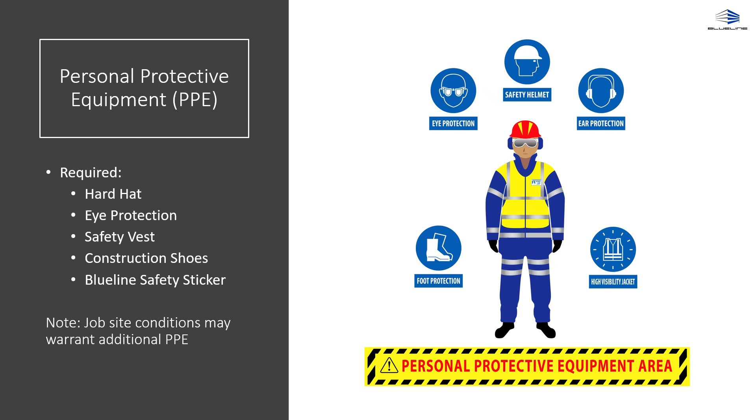If you come to the job site without the required PPE, it will be provided to you for an additional fee. Only authorized personnel are allowed on the job site, meaning if someone does not have their PPE, Blueline safety sticker, or is not a laborer or on the project team, then they are not allowed on site.

Safety stickers must be visible and worn at all times. If your sticker falls off, please report it to a member of the Blueline construction team and we will get you a replacement.

Any and all visitors must check in with the on-site superintendent or at the main construction office if applicable. If you see someone on site who does not look authorized to be there, please report it to the on-site superintendent immediately. Unauthorized individuals on site will be dismissed immediately and trespassers will be prosecuted.

The next two slides cover some general safety rules for the job site. Additional rules may apply depending on on-site conditions. The rules are as follows.

Emergencies: Every employee must know the emergency evacuation plan and their responsibilities in it. If you do not know the emergency evacuation plan, please contact your superintendent. First aid: Employees must notify a foreman immediately after any injury, regardless of its severity. Employees shall call 911 immediately only if an injury is life-threatening.

Smoking: Smoking is strictly forbidden. Authorized operation: Only authorized persons are permitted to operate, repair, or adjust machinery, vehicles, or equipment. Safety signs, tags, and posted speed limits.

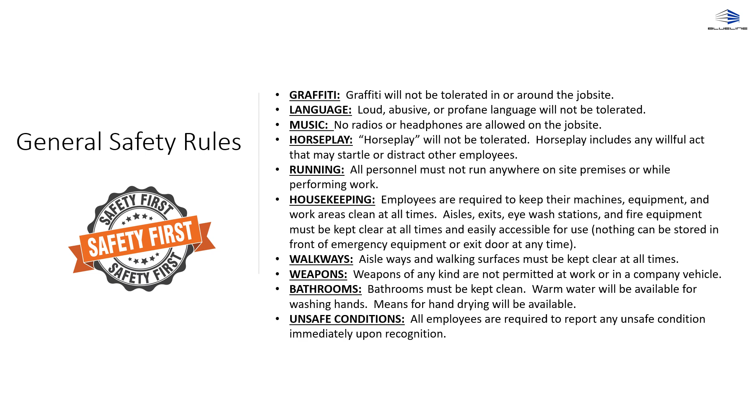Blueline recognizes that cell phones are a useful and necessary tool for project completion. However, while on the job site, cell phone use is to be limited to work purposes, like confirming scope with your project manager, asking an RFI, or calling in emergencies, and while on break. Personal cell phone use, like checking social media or personal messages, is to be limited to breaks only. Using your cell phone for personal use during work poses a danger to yourself and others because it is a major distraction. Your attention should be focused on the task at hand and not your phone. Please remember to always stay alert.

Porta potties and wash stations will be provided on the job site for your use. Do not use the on-site interior restrooms unless it has been cleared by property management. If you do not know if the interior restrooms are available, please ask the on-site superintendent. Please remember that we all share these and to keep them clean and tidy. Graffiti in or on the restroom stations will not be tolerated.

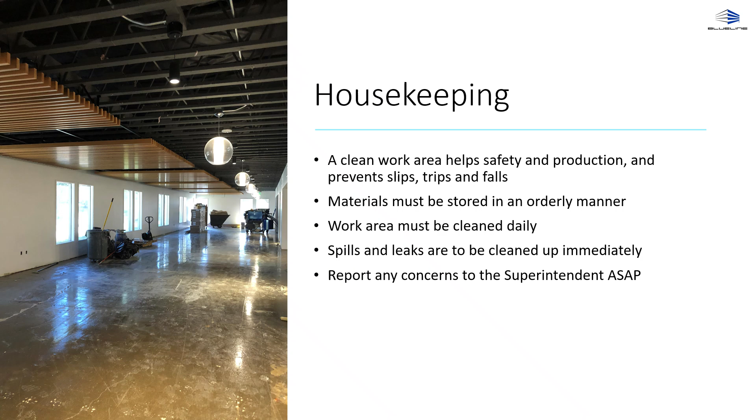If there is an issue with one of the restrooms, please report it to Blueline superintendent immediately. A clean and organized workplace not only helps with production, but prevents slips, trips, and falls, and improves overall safety of the job site. Remember to properly store all your tools and materials and clean your work area daily. You are responsible for your work area's cleanliness and trash cleanup. Do not leave garbage lying around. If you see a spill or leak, please clean it up immediately and report any concerns to the on-site superintendent. The job site is our office, and we want to take pride in it by keeping it clean and organized.

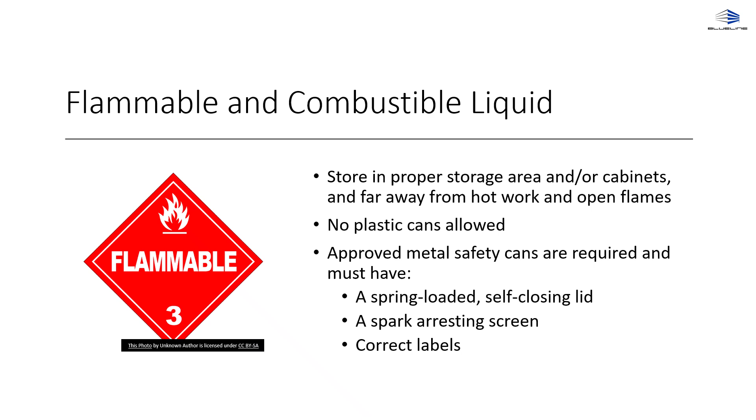If there is any flammable or combustible liquid on site, please always store it in the proper storage area or cabinets. Never leave it by hot work and open flames. Remember to only use approved metal safety cans when storing the liquid. Plastic cans are prohibited. Hot work includes grinding, cutting, welding, brazing, soldering, heating, hot air welding, or other operations that generate heat, arcs, sparks, or other sources of ignition.

Hot work can be dangerous and requires additional precautions while performing it. Always wear gloves and proper safety equipment. Prior to performing hot work, you must obtain a permit from the on-site superintendent. This permit will be good for one shift.

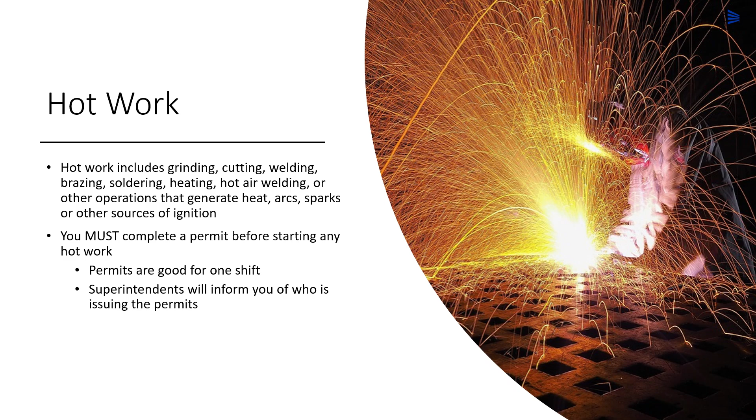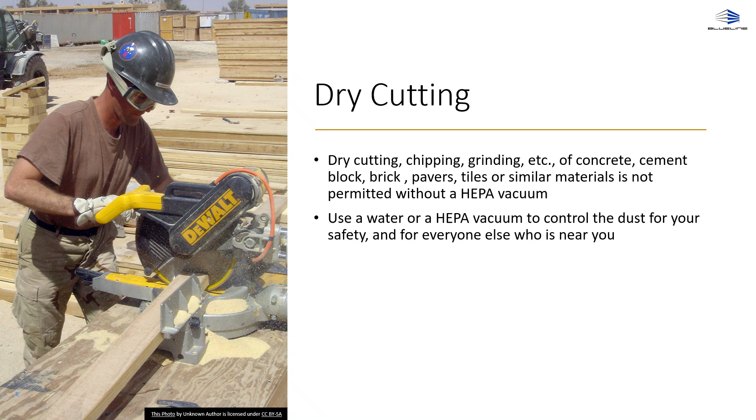Dry cutting, chipping, or grinding of concrete, cement block, brick, pavers, tiles, or similar materials is not permitted without a HEPA vacuum. We want to control the dust as much as possible on our projects to keep the air and area clean. In order to do that, use a water or HEPA vacuum to control your dust while performing dry cutting.

Fire extinguishers will always be provided on the job site, specifically in the areas of hot work, fuel storage, flammable and combustible liquid storage, temporary heaters, and any work that may generate a fire hazard. If you do not know how to use a fire extinguisher, please speak to the on-site superintendent and they will instruct you how.

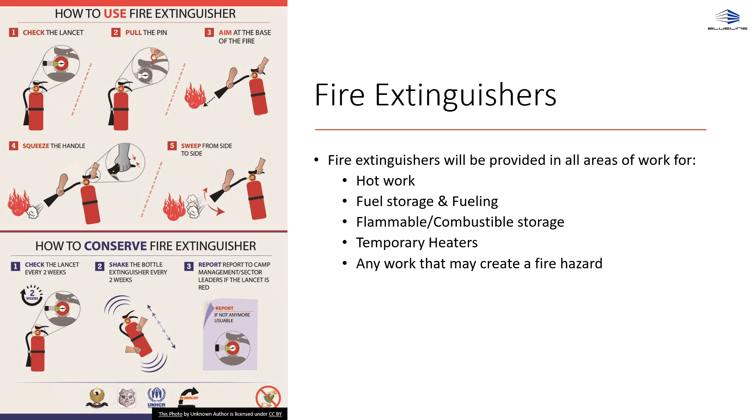Electrical cords and tools can be found all over the job site. Before use, inspect the tools to ensure there is no damage or wear. If there is damage, please remove the item from the job site immediately. It is very important that you consider all electrical equipment and wires to be live until properly tested and shown to be dead. Remember to always use the right equipment for your location and the present work conditions.

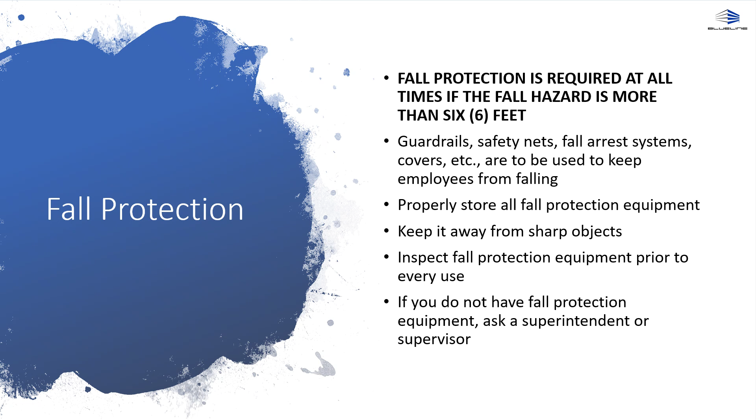Fall protection is required at all times if the fall hazard is more than 6 feet. Fall protection includes guardrails, safety nets, fall arrest systems, and covers. Always inspect fall protection equipment prior to every use. When finished with the equipment, properly store it and keep it away from sharp objects. If you do not have fall protection equipment, please ask a superintendent or supervisor.

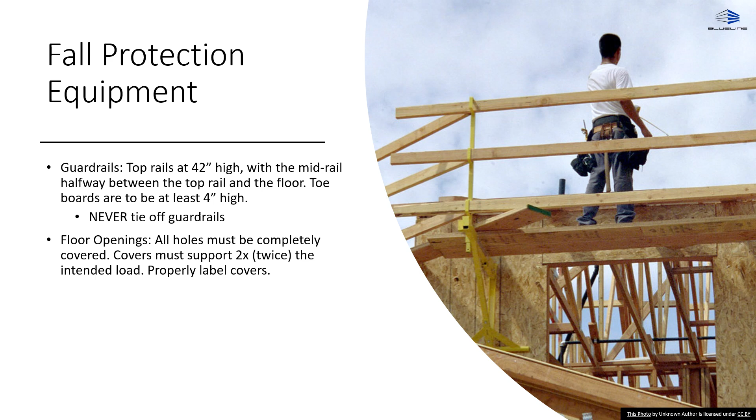Some further guidelines when using guardrails are to have the top rail at 42 inches high, with the mid-rail halfway between the top rail and the floor, with toe boards at least 4 inches high. Never tie off your guardrails. All floor openings are to be covered, and the covering should be able to support twice the intended load. When placing the cover, remember to properly label it with a description of what you are covering.

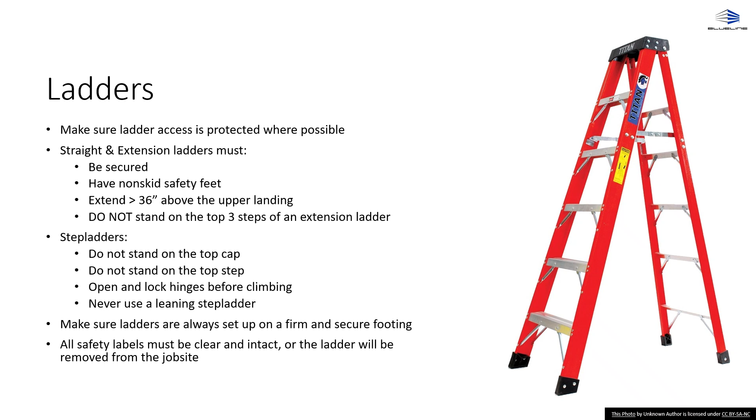There are a few types of ladders that will be used across the job site. Straight and extension ladders must be secured, have non-skid safety feet, and extend more than 36 inches above the upper landing. Do not stand on the top 3 steps of an extension ladder. When using step ladders, do not stand on the top cap or the top step. Open and lock hinges before climbing, and never use a leaning step ladder. Make sure ladders are always set up on a firm and secure footing. Lastly, all safety labels must be clear and intact on the ladders. If they are not, the ladder will be removed from the job site.

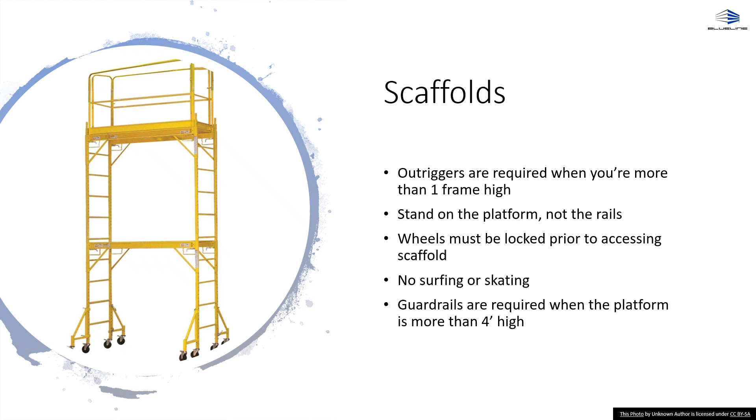When using scaffolds, never surf, skate, or stand on the rails. You are to only stand on the platform, lock the wheels while in use, and use outriggers while you are more than 1 frame high. Guardrails are also required when the platform is more than 4 feet high.

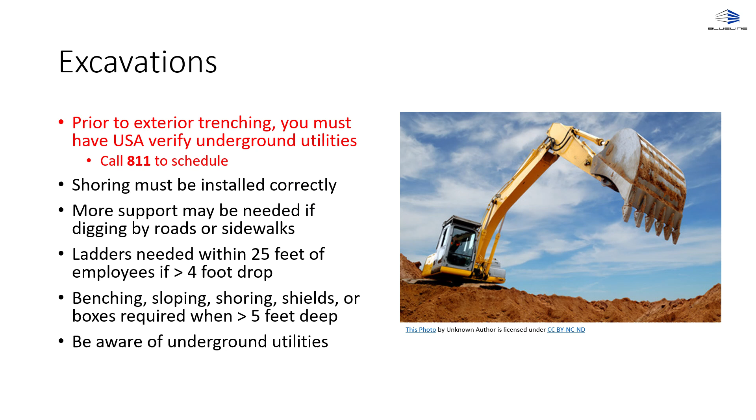Prior to any excavation work, be sure to check in and be aware of any underground utilities. If you are performing exterior trenching, you are required to call USA at 811 and have them verify the underground utilities. Remember to use the appropriate support and ladders depending on the depth of the excavation.

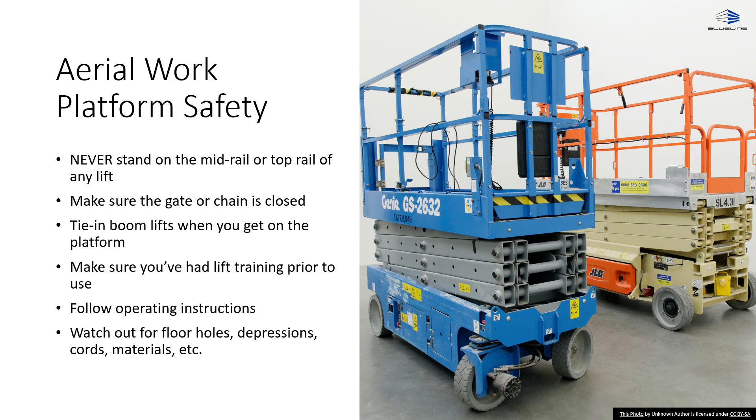Aerial lifts have become commonplace on job sites. Remember to never stand on the mid or top rail of any lift and to close the gate or chain. Tie in the boom lifts when you get on the platform and watch out for holes, depressions, cords, and other materials while in use. Always follow the operating instructions when performing work on an aerial lift.

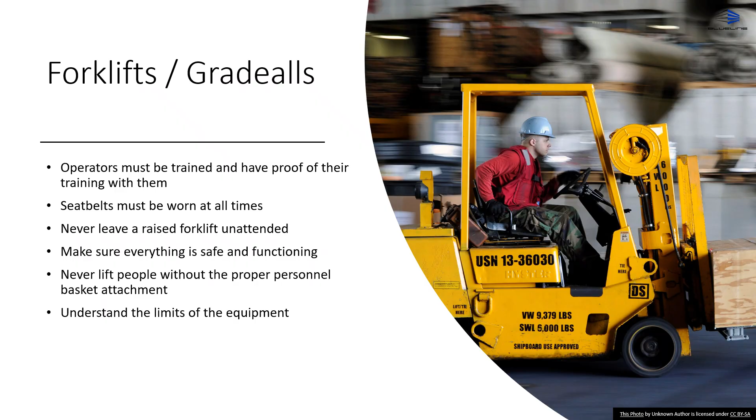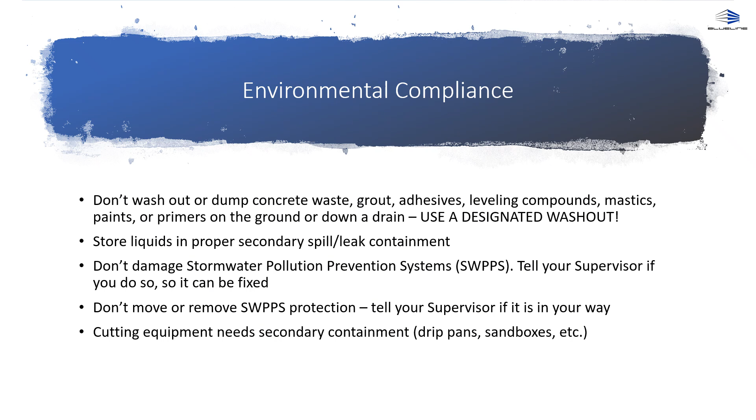Don't damage, move, or remove the stormwater pollution prevention systems. Tell your supervisor if they are in your way or if they are broken and they will be fixed. Also, cutting equipment needs secondary containment like a drip pan or sandbox.

Now that we have covered best practices and procedures in regards to on-site work and safety, we will cover what to do in the case of an emergency. An emergency is any situation that poses an immediate threat to life or property. In the event of an incident, like a fire or injury, that requires the assistance of outside personnel, craftspersons and superintendents shall contact Blueline management immediately. If the situation requires immediate outside attention and there is no time to contact a management team member, individuals shall dial 911.

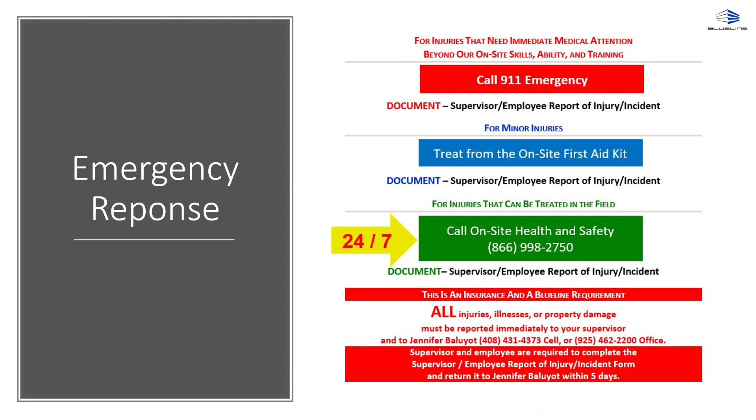Before entering the job site, there are several emergency locations you need to be aware of. At all times, you should know where you are on the site, where the two closest exits and exit routes are, how to get out safely, where to meet in the case of an emergency, and the locations of the electrical room, riser room, eye wash station, first aid station, and emergency exits.

If you do not know where these locations or areas are, please talk to the on-site superintendent prior to beginning work. Also, if any alarms go off or there is a verbal sign to exit, please leave the work site immediately using the closest safety route. Remember to check in with your superintendent after evacuation.

Heat exhaustion and heat stroke are very prevalent in the summer months. In order to avoid heat exhaustion or stroke, do the following: drink water every 15 minutes, don't drink too much caffeine as it can further dehydrate you, and remember to rest in the shade and watch out for each other.

If someone in your crew has symptoms, notify the superintendent or supervisor immediately. Move the person to a cool, shaded area and slowly give them water. If available, give them ice packs and fan them. Always remember to stay aware, drink plenty of water, and take a rest if needed.

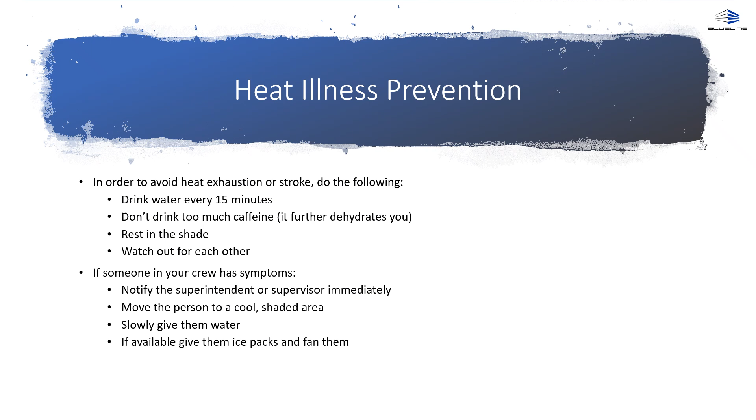Being in the state of California, earthquakes can and do happen. If an earthquake does occur, do not panic. Quickly find a sturdy and safe place to get cover, like a doorway or table, and hold on. Once the shaking has stopped, evacuate the job site and head to the designated evacuation area and check in with the on-site superintendent. Remember, do not panic and find a safe place to get cover.

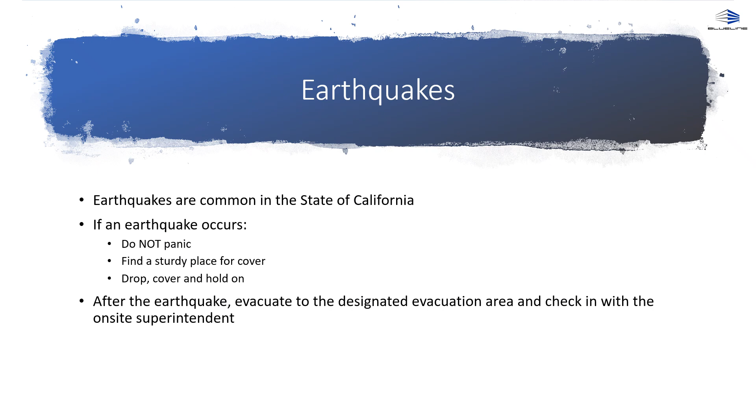Each and every employee on site is responsible for their own and their team's safety. All accidents, incidents, and near misses must be reported immediately to your supervisor and the Blueline supervisor. A full report of the incident must be completed by the end of the shift by the on-site superintendent or supervisor. Incident reports must be submitted to Blueline Safety Manager or Human Resources Department. Injured employees must be accompanied to the hospital or clinic by a superintendent or supervisor. Remember to always notify a member of the Blueline construction team if there is an incident or accident.

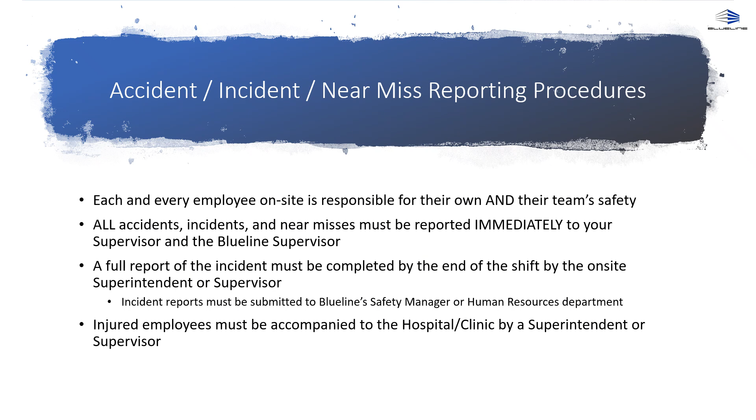Blueline is here to help and to keep the people who work with us safe. We are all on the same team.

Everyone on the job site is required to adhere to the safety policies covered in this presentation. Inspections of the job site will be completed periodically and safety violations will be addressed immediately. Violations of safety policies or general code of conduct may result in immediate dismissal from the job site.

All authorized crew members will be required to display their Blueline safety sticker prominently on their hard hat. As a reminder, if you lose your Blueline safety sticker, please contact the on-site superintendent and we will get you a replacement. If you have any questions or concerns with regards to our site safety training or safety guidelines, please contact Blueline Safety Manager or a member of the Blueline construction team.